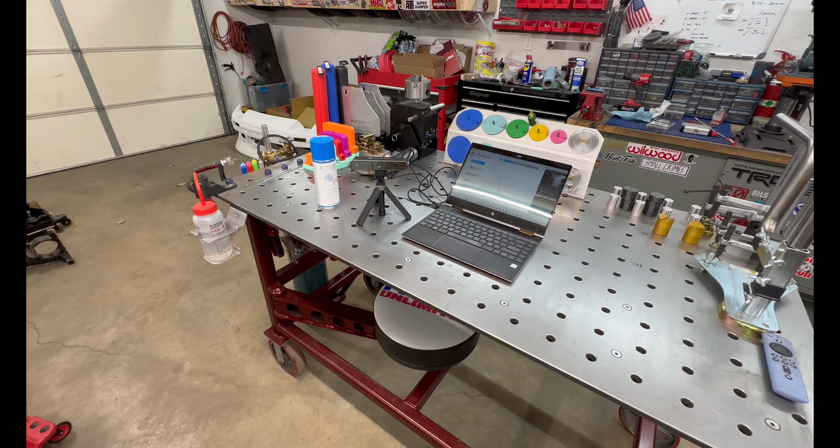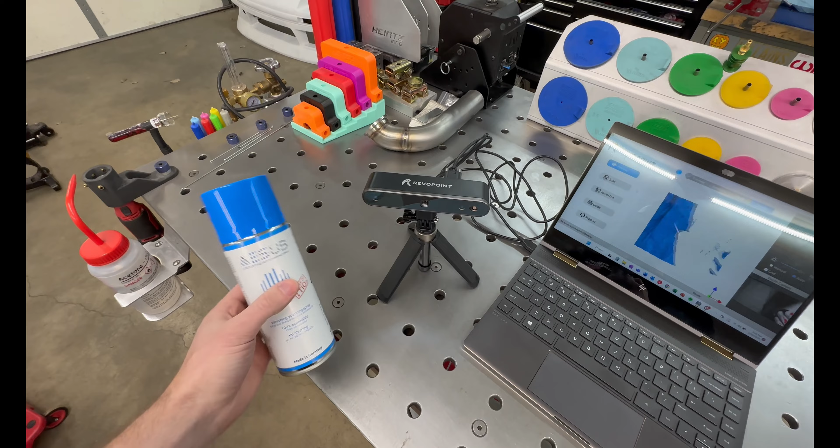Okay, so the first step is 3D scanning. And the 3D scanner I'm using is a RevoPoint Pop 2, and I like to use this AE-SUB 3D scanner spray. It's a dissolving, vanishing spray that you use on the surface. It helps to lighten up those dark areas so that everything shows up in your model.

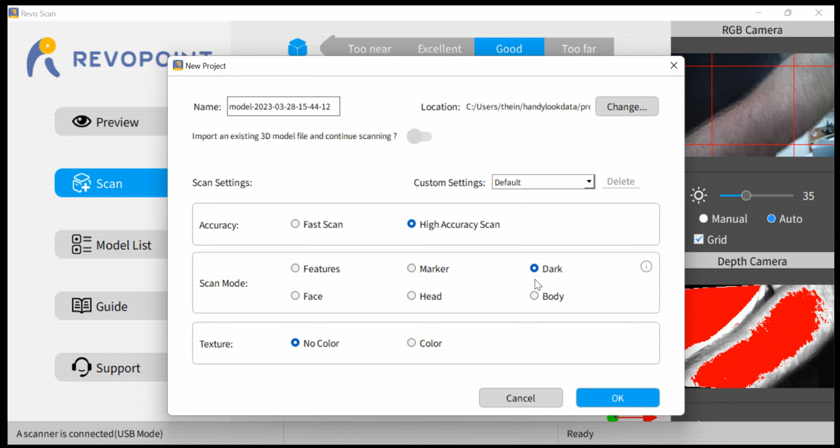And then this is the software that I use, and I typically just go to scan and use the high accuracy scan. I use dark mode and no color. A lot of people like to use marker mode so that you can combine multiple scans. I haven't been able to get that to work very well at all. And since I'm underneath the car, it's really dark, I'm gonna use dark mode.

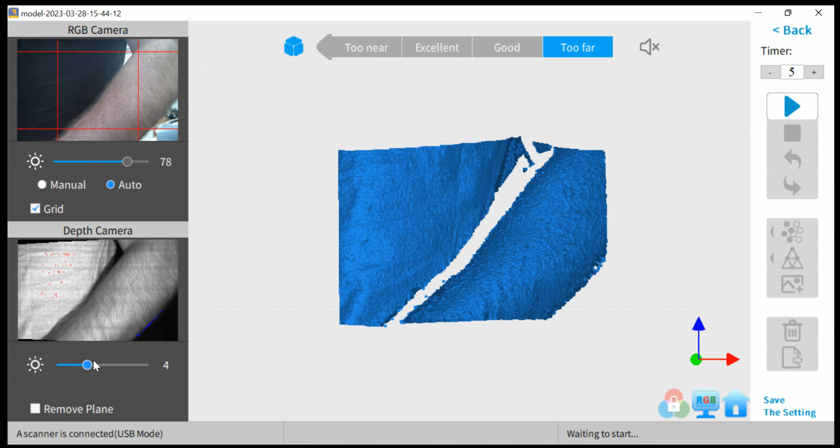And then here, the only thing that I adjust on this screen is really just my depth camera. And I adjust this brightness down until I lose the red. And as soon as I lose the red, I'm ready to roll. So right there is where I would keep it. All right, let's go ahead and get underneath the car and start scanning.

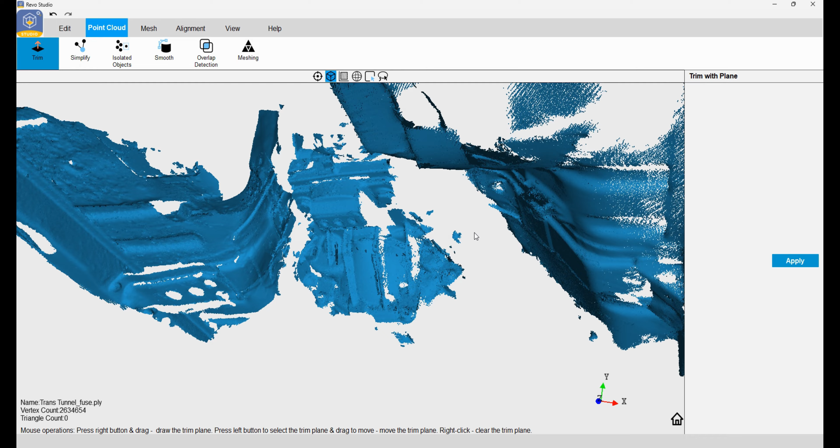Okay, unfortunately, I did not get any footage of me scanning the underside of the trans tunnel because my computer couldn't handle scanning and screen recording at the same time. So this is the final product that we got, and the quality is to be expected, but it will definitely improve as we go along. So really the main gist is that we have our trans mount bushing and these sides of the trans tunnel, because that's where we're going to be connecting to.

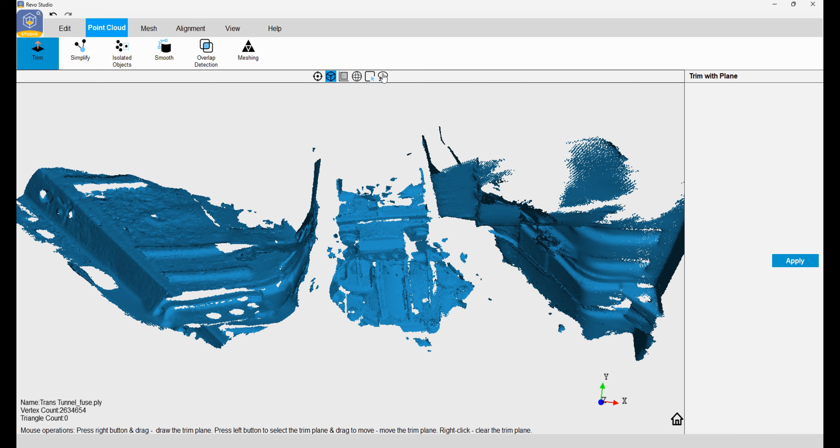So the first step here, I took the 3D scan and dropped it into Revo Studio, another software offered with the purchase of this product, and then I go and trim. So if you go up to the poly, you can come up here and you can start outlining things that you want to delete, and it's as simple as that to clean up your product. And then from there, you can simplify.

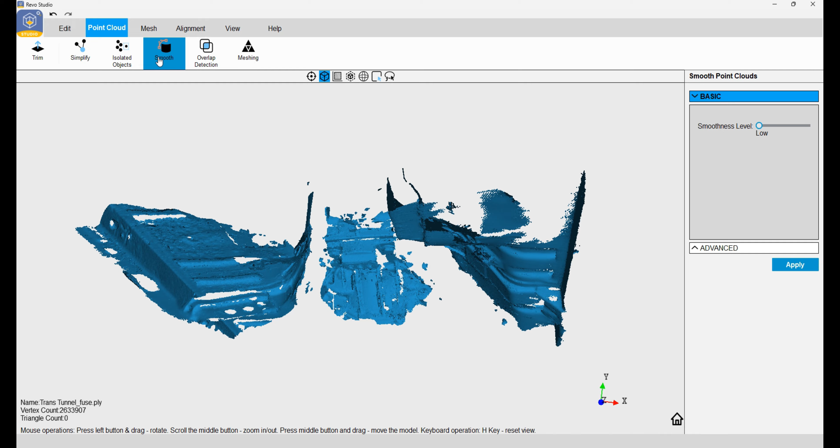Here we just are reducing the vertex count, so it's reducing your file size, making it a little bit less reliable. So I typically don't do anything here. I just leave it as large as it is and hope my nice PC can handle it. And then smoothing, you can smooth everything out. Again, you're kind of losing some of the quality by doing that, but you can get away with some of that.

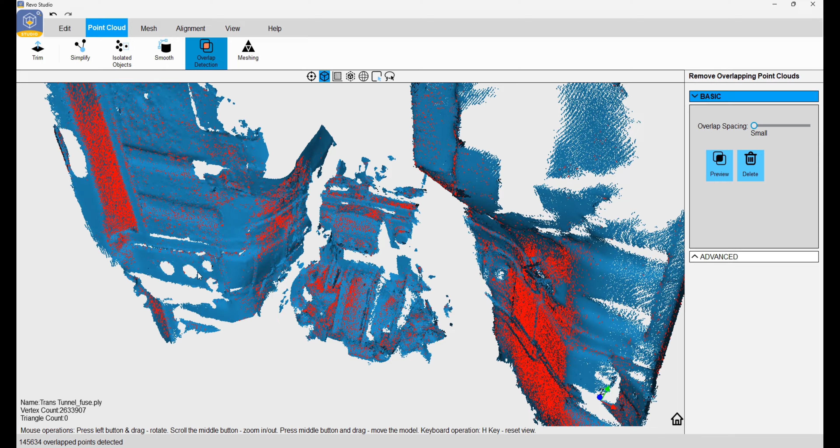Overlap detection, this is a big one. I like to start with large or small and just do either or. So I can preview the small overlaps, delete them, then preview the large overlaps, delete them. And that gets rid of all of the unnecessary overlapping that occurs with 3D scanning. As you go over multiple passes, sometimes it picks up on stuff and bunches it up.

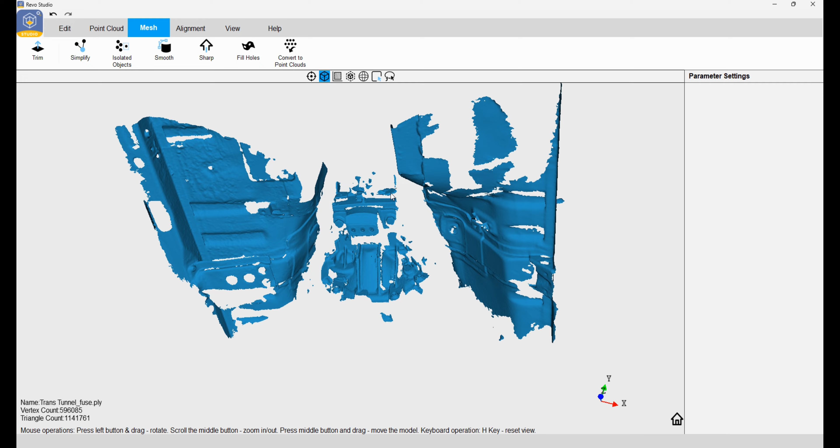Okay, after doing the overlap detection, I like to mesh it. And when I mesh, I do ultra high definition. I do not fill any holes, and I've already done that. So this is what it looks like. You see how the quality has improved significantly, and this is definitely something we can work with.

So now that I've got to this stage, I'm just going to go ahead and clean up some of this extra junk here, and we will go into SolidWorks, and I'll show you kind of my first steps in coming up with a trans mount solution.

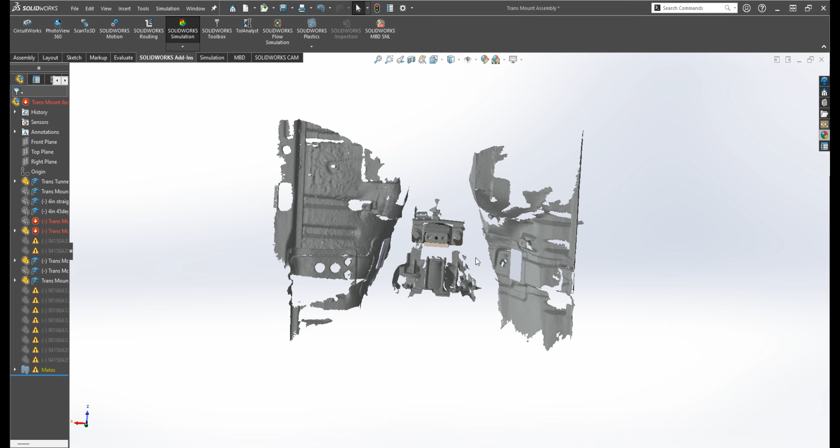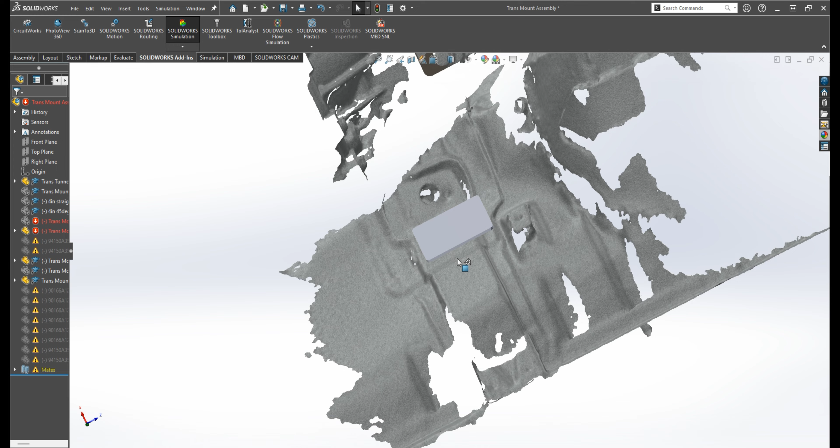All right, here is our final 3D scan imported as an STL file into SolidWorks, and SolidWorks is definitely my preferred CAD software of choice. I've used this for nearly 10 years now, and I've used Siemens NX, a couple other ones, but this is what I have access to and the most experience in. As you can see, the 3D scan detail is really nice, especially when you add a little bit of texture to it.

So I like to add aluminum powder coat to all my 3D scans, and it really improves the layering and just makes it look a little bit more clean. So right here you can see I had cut out the OEM trans mount hump. This is something that got in the way of the CD009. So I'm really starting from scratch here.

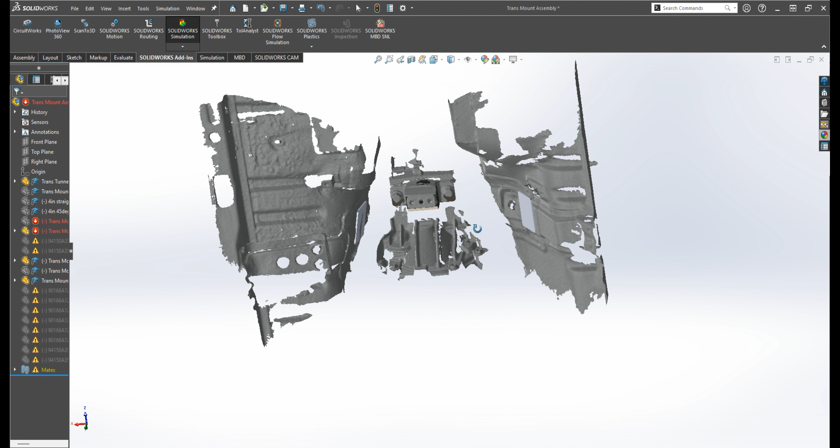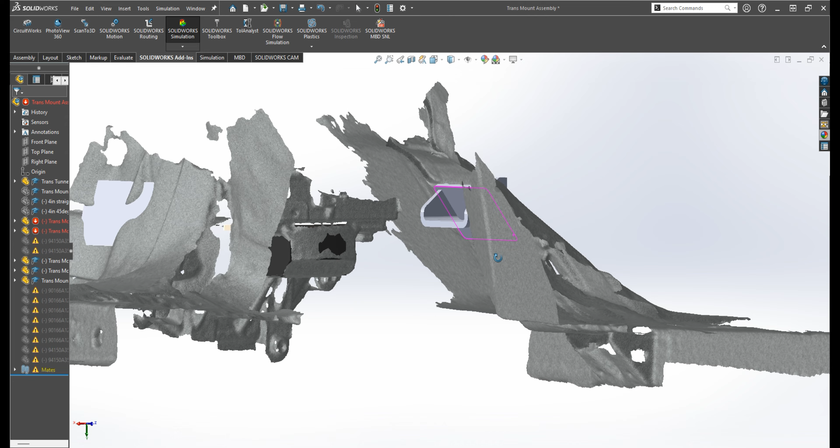And because of that, I decided to add some sheet metal to the insides before I put on some additional brackets, which are here and here. So these two brackets right now are protruding outside of the trans tunnel, and that's because of the way that it is bent at SendCutSend, and I'll dive into that more here in a minute. But the final product will be ground so that it is flush to this plate and then welded, and from there it's just a matter of connecting the dots, trying to get from one side to the other and attaching to our rubber transmount here.

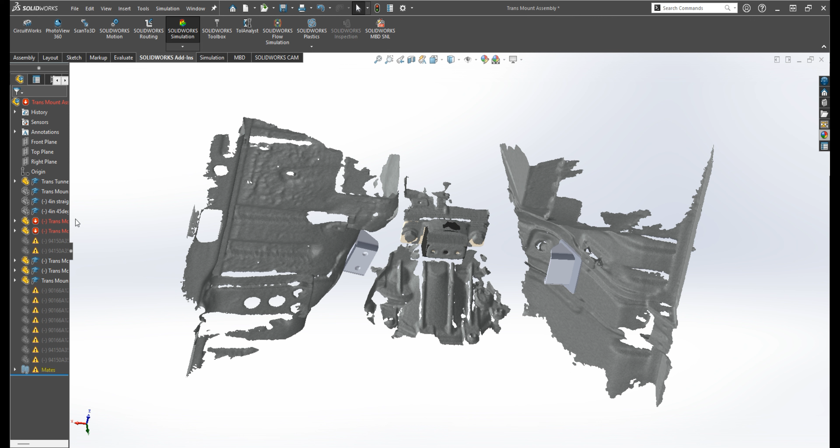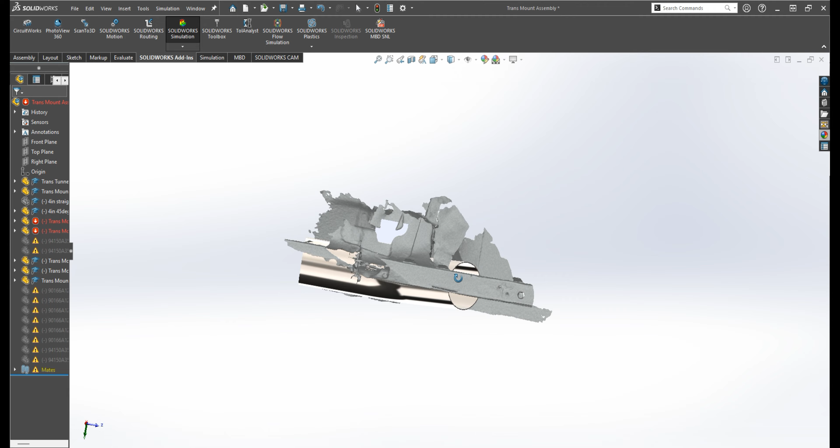So the biggest concern now is clearance. I need to fit a 4-inch diameter stainless tube for exhaust underneath this thing. So that is why the transmount ended up being so bent like this. So it's a little odd shaped, it's a little weird, but it provides the clearance that I need to fit this 4-inch diameter exhaust and keep it above the frame rails, or just slightly below. It'll be pretty close. We'll see. So this is the final product. We're ready to get this over to SendCutSend, and I'm going to show you real quick how that process goes.

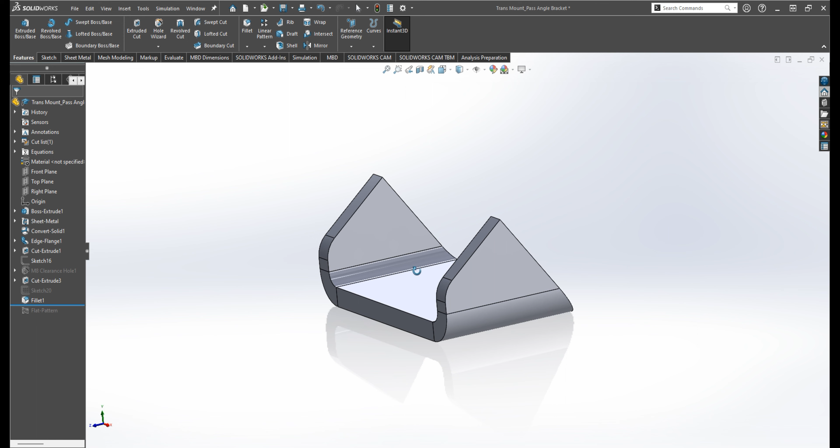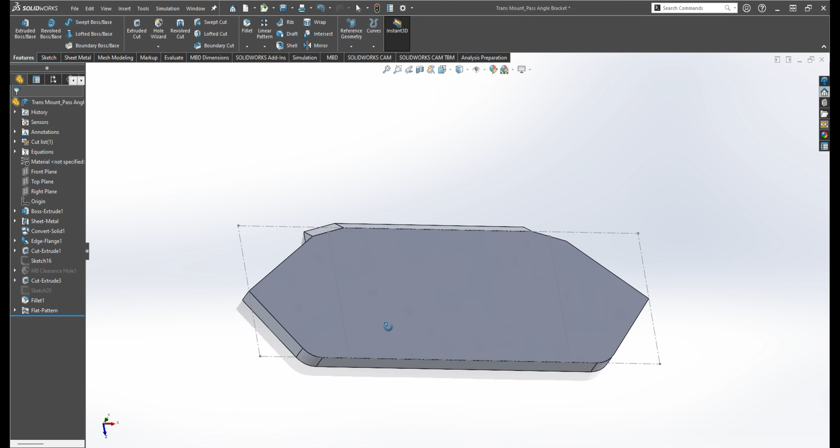So the first part that we're going to talk about is the bracket that gets welded to the inside of the transmission tunnel. And this is a good part to use as an example for how to submit to SendCutSend, because there's a lot of guidelines that go into making this part. So this is the face that will be welded to the inside of the transmission tunnel, and we've obviously got some weird angles here. So if we were to try and flatten this piece and provide a DXF file for it, we'd have this. So this would not turn out right. We cannot 2D laser cut something like this. So I have to remove that. So in order to have SendCutSend make this, I'm removing the cut extrude, and this is my flat plate now. So I'm just going to by hand cut that off.

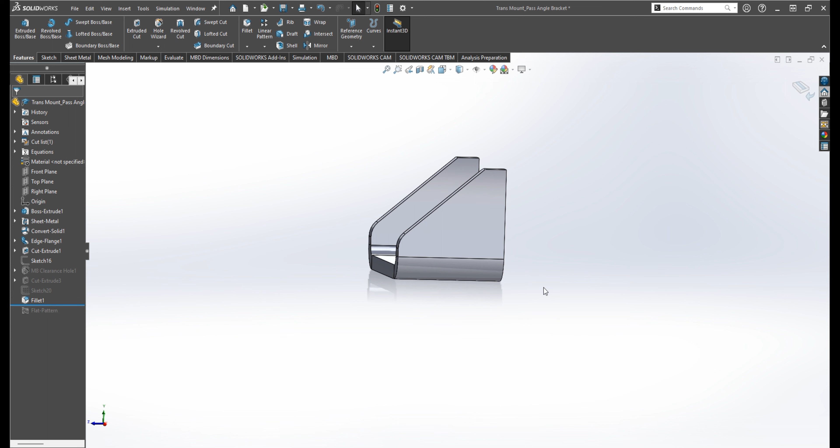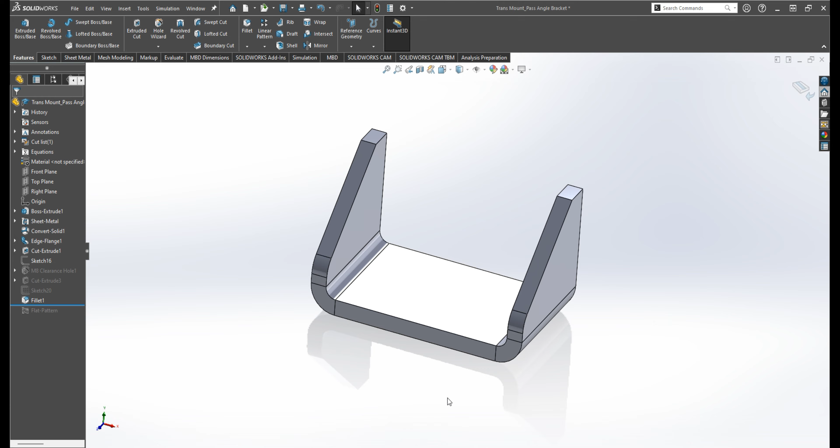And this is a big part about using SendCutSend as a service, is not everything that you get from them has to be some perfectly fit up product. I use a lot of their services just to get me really far in the fabrication process so that I can do the rest, little important features, by hand to make sure that my fit up is perfect. So let's go over some of those guidelines and where to find them. So on SendCutSend's website, under the resources tab, you can go to the guidelines here and read up about what it is you're asking them to do.

So the more difficult stuff is bending. And for bending, a lot of what I get tripped up on is with die width considerations and with U-channels. So this is a perfect part for that because it hits on both of those. And where you can find more detailed information on this, for example, for the part that we're making, this is a metal, and it is a mild steel, and it is 0.187 inches thick, HRPO. Down here at the bottom, it displays some of the considerations for bending. And right here, it says the die width, which is 0.984.

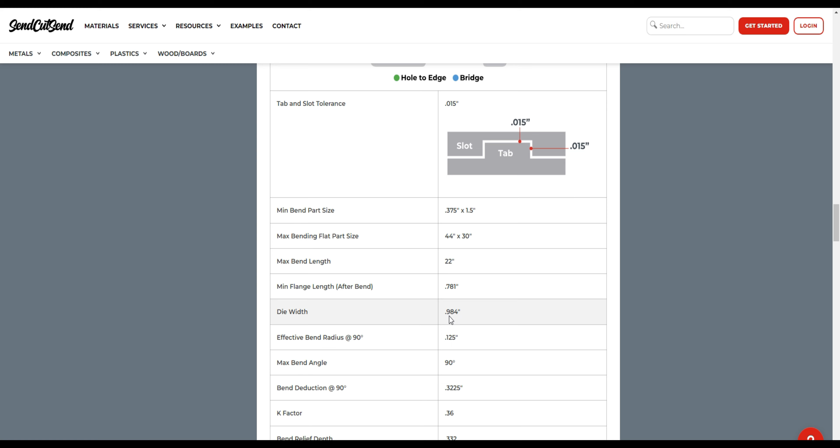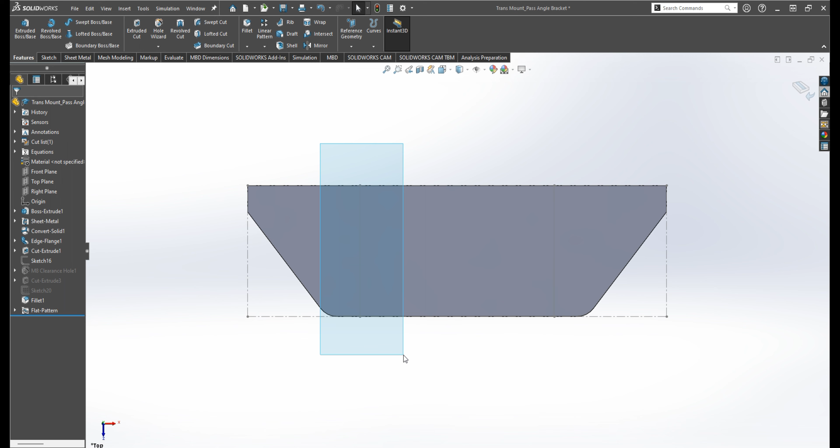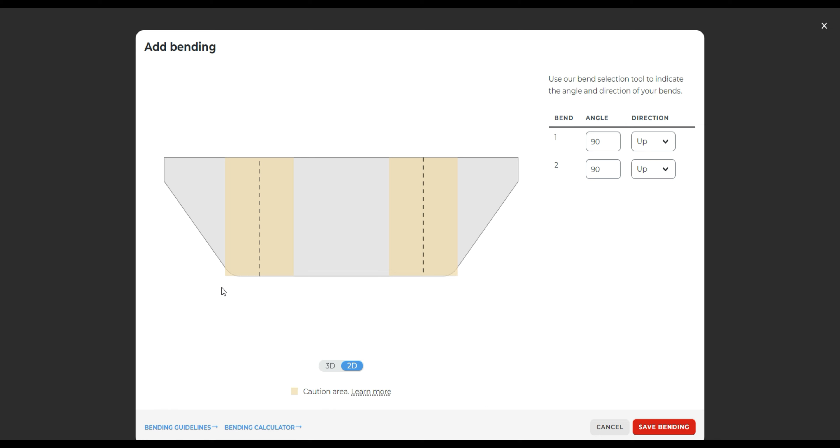And if you go back to our SolidWorks model, and we flatten this, I could sketch a square right now to check 0.984 and make sure that 0.984 was appropriate enough of a width to capture all the material that needs to be bent. And unfortunately it's not. It's really close though. And SendCutSend's awesome software actually catches that. So when I go and upload this into their website and add the material type 0.188 and bending and save it, it actually tells me that this is a caution area because my die width is larger than the amount of material I'm providing. Luckily, it's only a tiny little corner, so this works out well.

But here we can see that we've got our bend angles correct, we've got our directions correct, and we're all set up to go. So this is how you kind of get into the uploading process, selecting your material, making sure that you go over the bending guidelines or laser cutting guidelines to make sure it fits their requirements. Okay, so the last part we're going to cover really quickly is just the transmount itself. And for this one, I want to cover a little bit more about the sheet metal function.

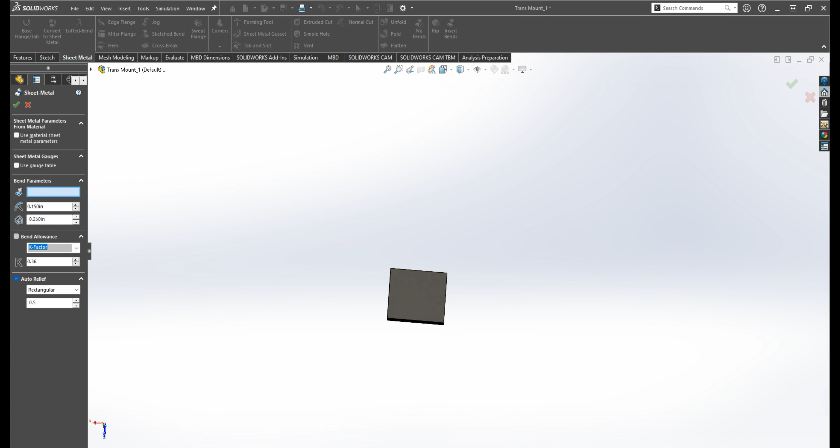And for this part, it's really crucial for any of your bending stuff that in your CAD software, you go ahead and set up all of your sheet metal parameters according to the website. So if you go to SendCutSend's website, you go back to your material type and thickness, they have all of this information in here. They have the effective bend radius, the K factor, and you just take that information, you plug it right into SolidWorks or your CAD profile, and it's already in there for you. So everything is exactly as it should be when you go to export it as a DXF.

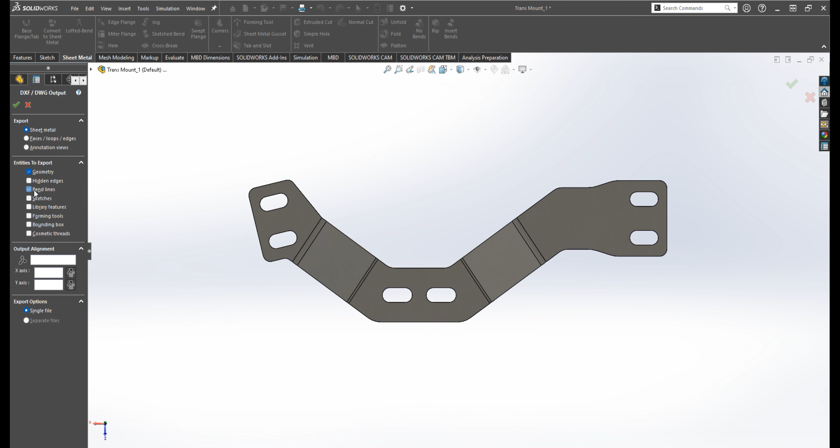And to export it as a DXF, it's very simple. Gonna export it like this, and we make sure that we are in the appropriate view, and we do it as sheet metal. We go to bend lines. Definitely have to make sure you have your bend lines in there, and that's our flattened pattern with the bend lines annotated. And what we're left with is everything that we need for a trans mount to be fabricated ourselves, or finish fabricated.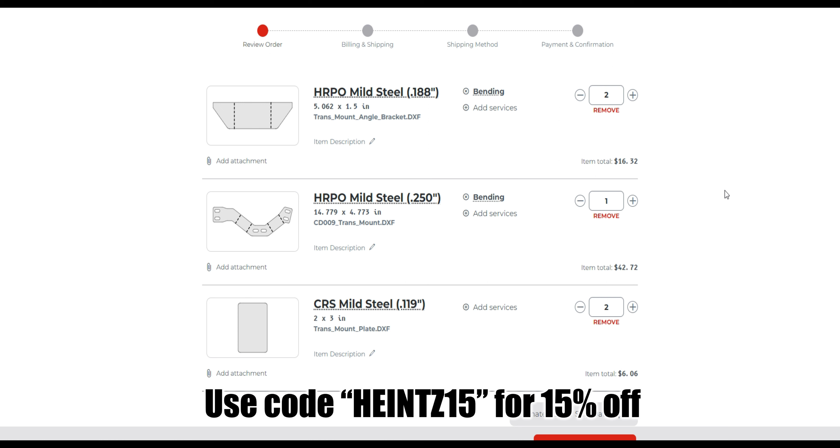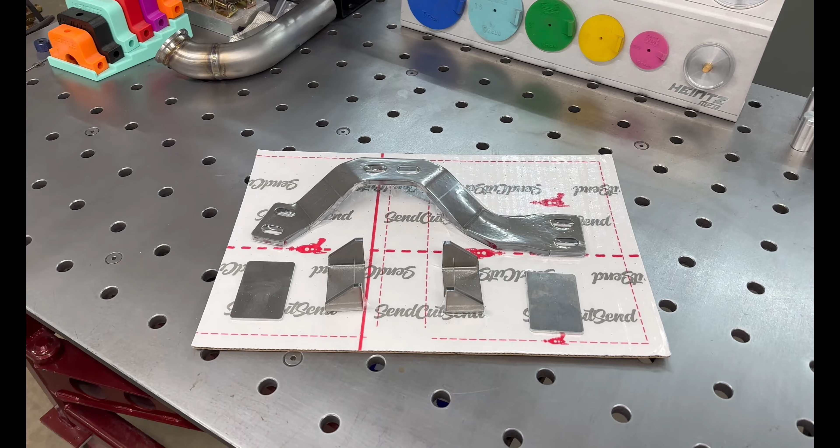Like I said, I use SendCutSend a lot for just getting me way further along in the fabrication process. But yeah, $65 and you have yourself a trans mount that you can fit up, weld up, and be for a totally custom application. So it's been exactly 6 days since the day that I submitted the order online to the day that I received it. And really, that is pretty dang good.

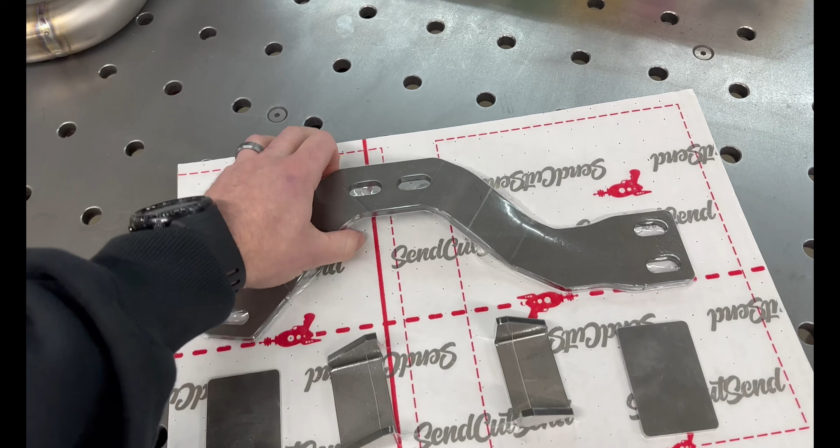The more features that you add, like countersinking, tapping, powder coat, it all is going to add more time. But really, if you just do your planning right and you have everything pre-organized, you can really utilize a service like this to get ahead on your projects. So now let's go underneath the car and see how things fit.

All right, this is the moment of truth. So far, so good. So we got a nice amount of give, so we can kind of position that how we want. And then these are the pieces that'll get ground down on the sides. It's gonna be a tight fit, but it should do.

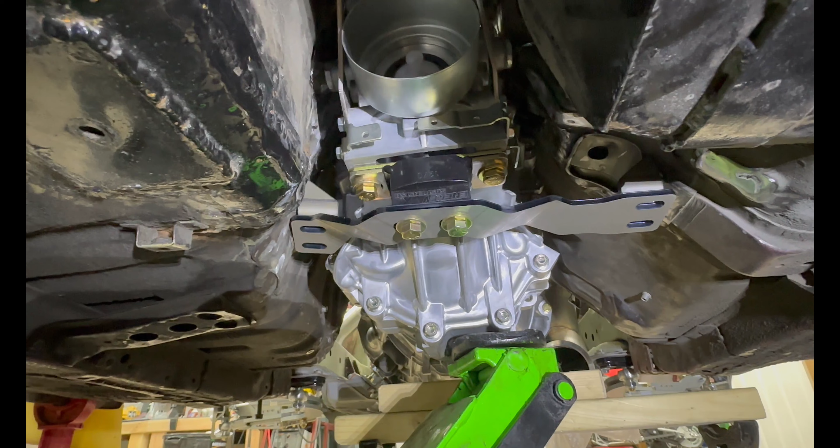So it looks like it fits up pretty dang well. I've got really tight clearance here and here to where I'd have to modify this a bit. But then I realized my engine's maybe a little crooked. So I need to offset that a little bit, since I've had this engine out since the original scan, actually. So yeah, that'll help. I'll just be able to clean up this corner by pushing the trans over to where it actually is supposed to be.

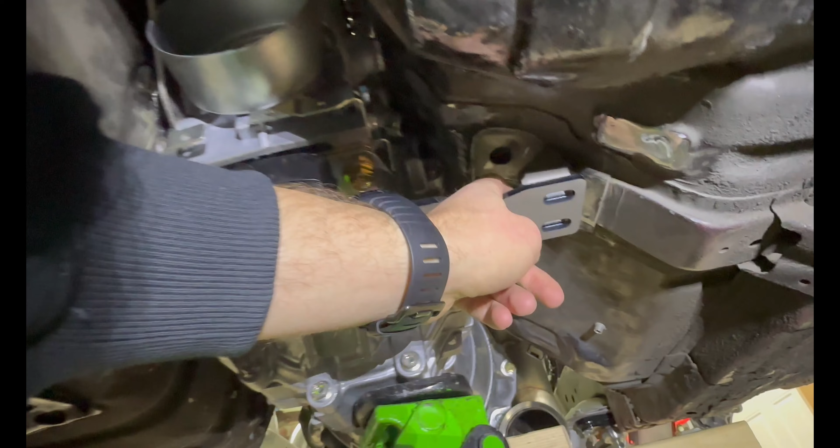And then these need to get ground down by hand to match whatever that angle is, and get welded to these plates that SendCutSend also provided. So yeah, this is going to be pretty decent. It should be a pretty quick job. For anyone that wants to copy, this is a very generically used trans mount bushing, and it's Energy Suspension part number 1270. So I can't remember what engine or transmission that's originally from, but very common to use. So this bolts right up to the CD009 trans.

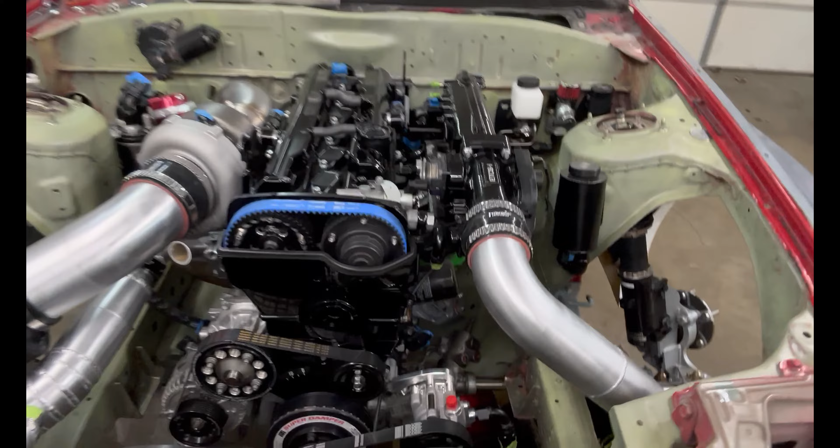All right, so the trans mount fits, but I think I'm gonna hold off on final welding and fabrication for that until the engine comes out for its last time, because I do have some rust that I need to fix on the frame rails. I wanna plug up some of the holes and do last final fit and finish on the engine mounts, because those were Xcessive Manufacturing mounts that were modified just slightly to lower them down closer to the steering rack. So once all that's done, I think it would be the most appropriate time to go ahead and do the final welding for that trans mount.

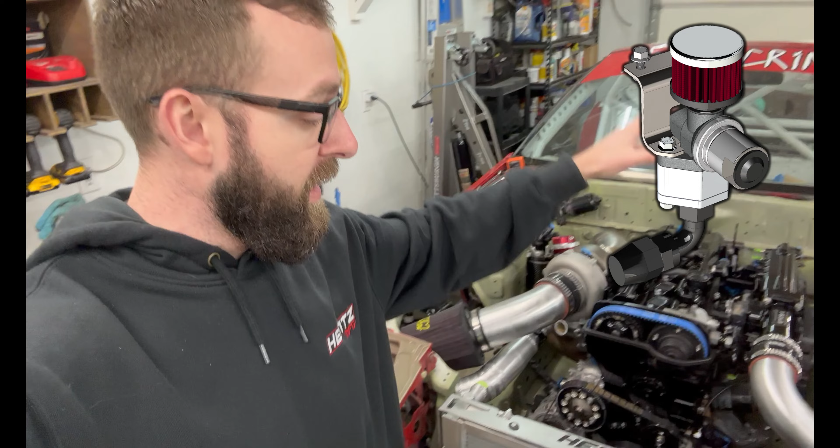And the purpose of this video is really just to show you my process in using CAD and 3D scanning to move forward with your projects, and then using an outside source like SendCutSend for producing them. And I've used that whole process for so many things on this car already that I'll highlight here, like the fuel pressure regulator on the firewall, the idle air control valve, the whole front assembly here for the radiator and intercooler, and the entire fuel cell. So, I really encourage you guys to look into CAD and finding a software that works for you and start implementing that into your fabrication process.